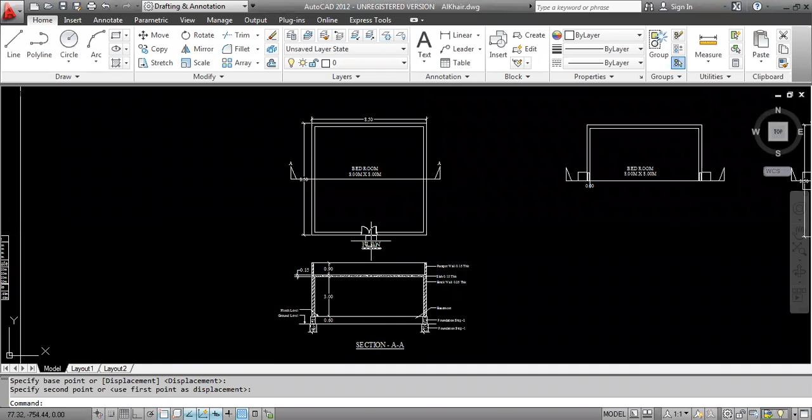See, yesterday we drew our room section. All are confused what we drawn. This is a section. When we construct any room, we have to give a wall thickness and height of the building. In section we are showing the whole details.

See, this is our foundation, this is our ground level. In ground level we are giving some foundations.

What happened, my voice is clear or not? Can you able to hear my voice? If you guys could not able to hear, it's your problem. Shahid, can you able to hear my voice? Yes sir. I think you guys have some network issue over there. From my side it's okay. Once you check over there, okay.

See, in this drawing I'm showing a section: what is the foundation level, what is our building height, what is our slab thickness, and what is our parapet wall size.

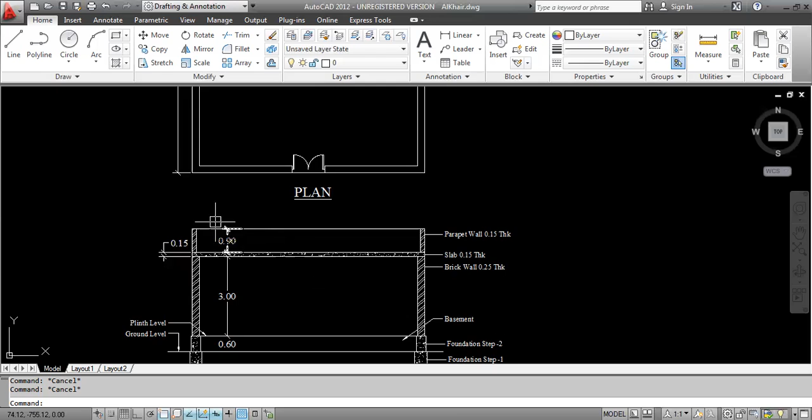See here, this is our parapet wall. Whenever you go to up floor, first floor, or else in your houses, you can able to see a balcony. The balcony wall height was this much. You think of it as a balcony wall. In AutoCAD, when we are drawing, we just give a name to this wall as parapet wall.

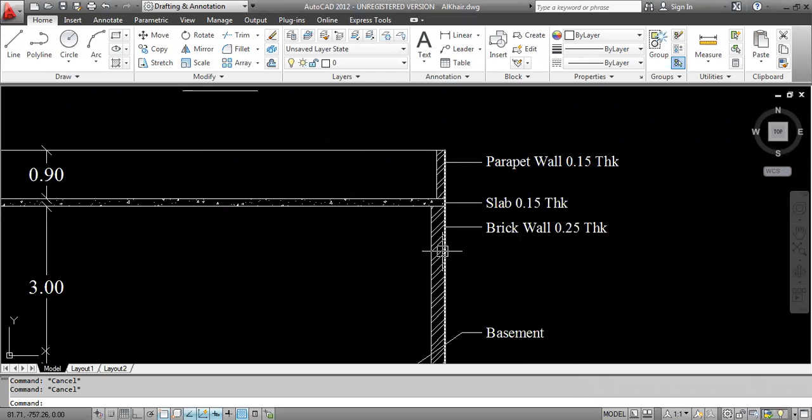Okay, this is slab thickness. Slab thickness was 0.15, and this is a brick wall. Brick wall size, outer wall size, how much? 0.25. Okay, this is our brick wall.

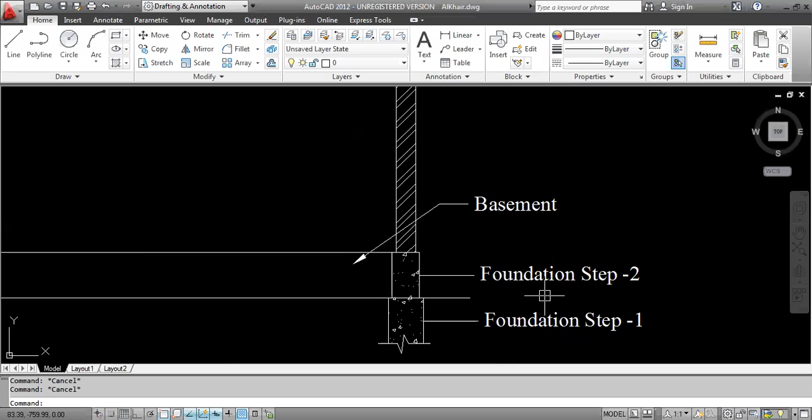And see here, this is a basement. After we provide our foundations, we will give basement. After here we are showing foundation level step 1 and foundation step 2. This is our drawing, and this is our plinth level.

Plinth level means when you finish your basement, it's up to clean. In that you are attaching marble stone, or else you're just pouring concrete over there. This is what is called your plinth level. This is your plinth level, and this is basement.

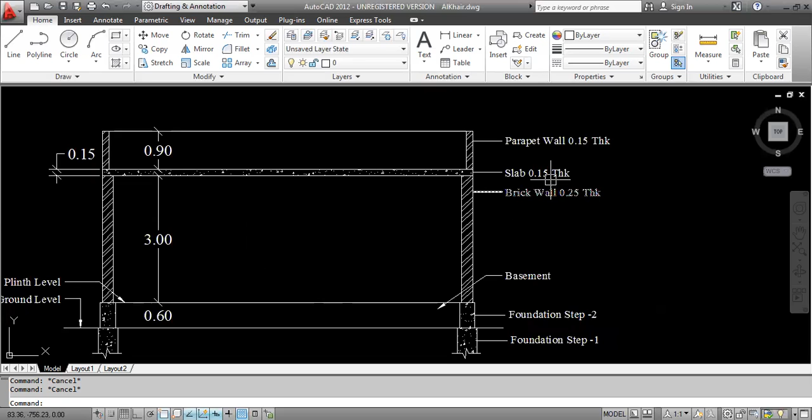This is foundation step 1, step 2, and this is basement, slab thickness, and wall. Why? Because in this wall we did not mention any kind of windows. Now today the same wall I took. Just I drew over here, I'll show you.

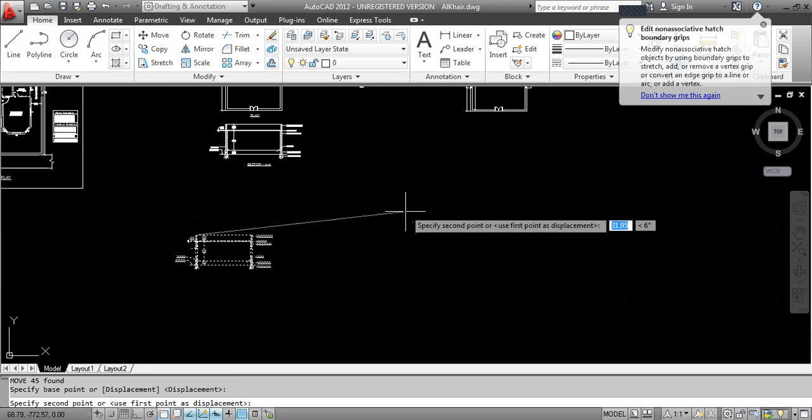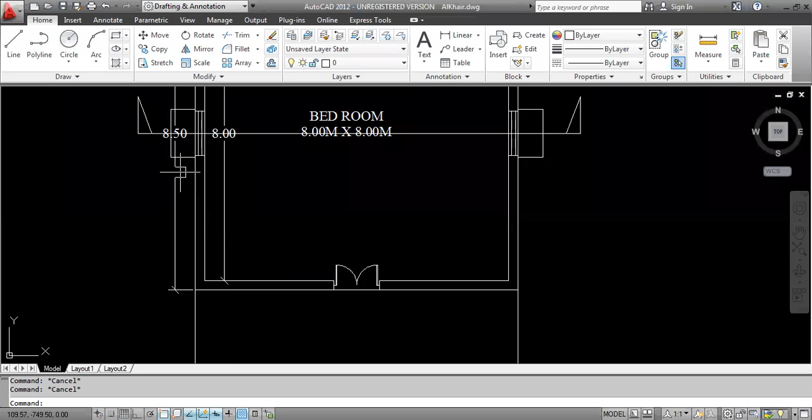Outside, this is not a platform, this is a sunshade. See here, I'm providing here sunshade. Now we have to show here a window.

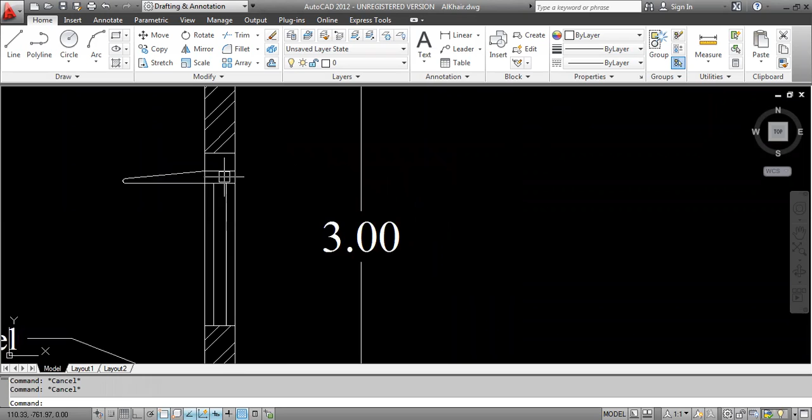Window, enter. Just will show as these lines, window opening, window indication over here, and here will show some concrete hatch. You have to take here concrete here and here, again enter.

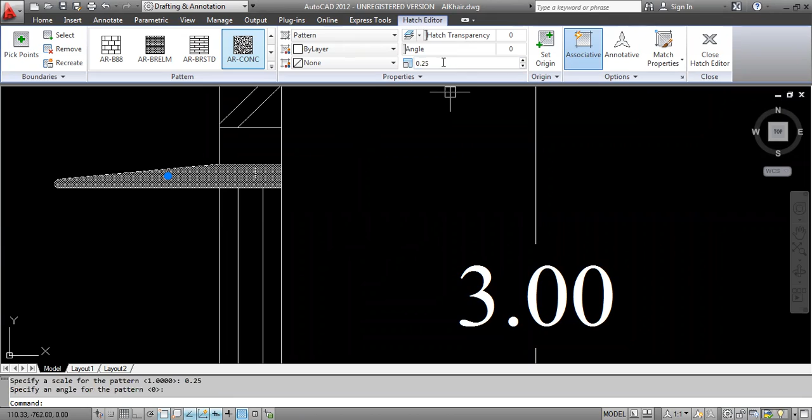If you want to change the size, you can able to change from here. How much? 0.25. Enter. It's too big, then we will give 0.1. See, if you want to make it small again, 0.025. See, you can able to see over here, and this is your

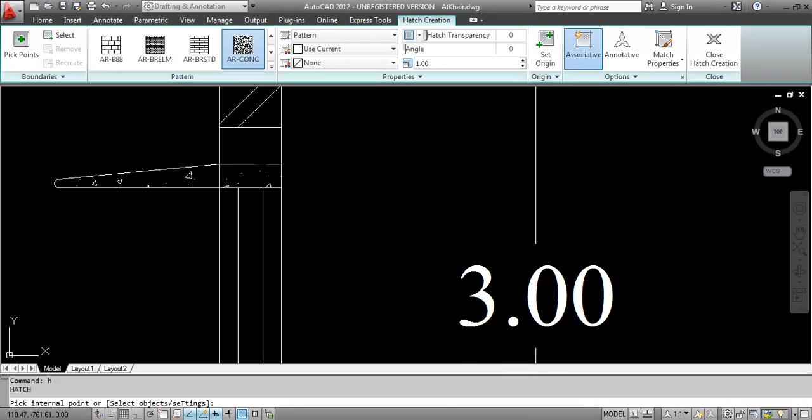bed. Hatch again, sand. Okay, nothing will happen, you took concrete in the same place. Again hatch. Okay, see, this is your platform. You have to mention over here the name.

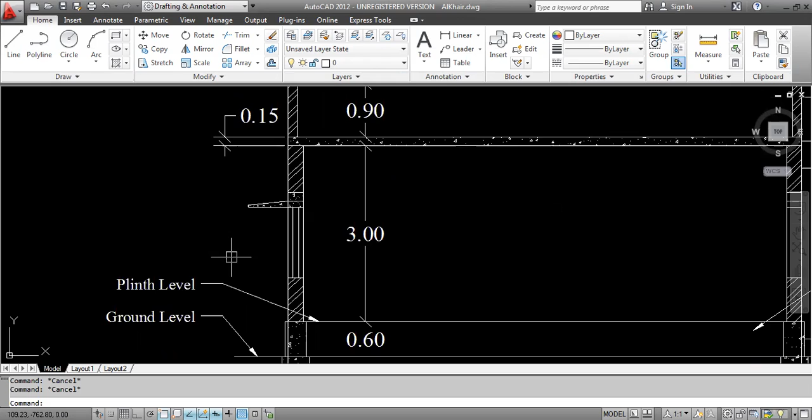If you want to type this one for creating your name, sunshade, sunshade.

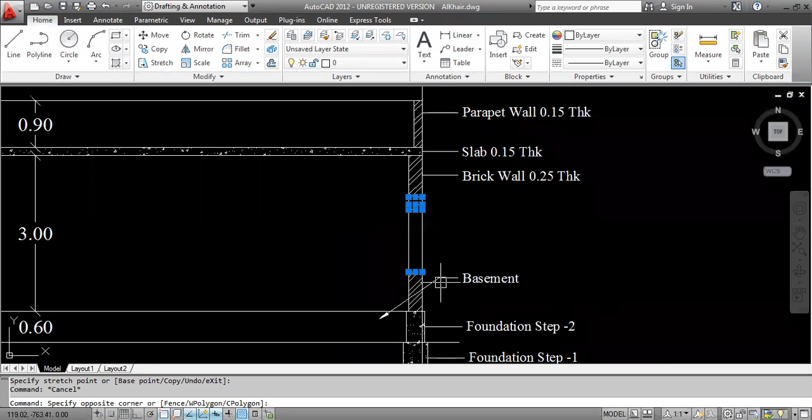I'll remove the whole thing. First, we'll draw over here. Here we have to give some concrete arc.

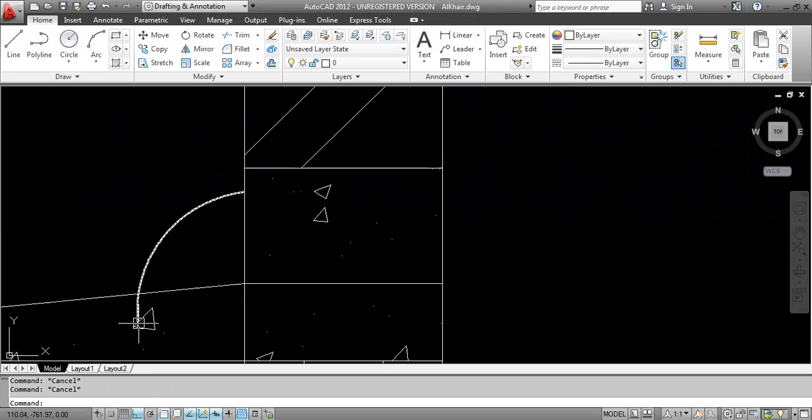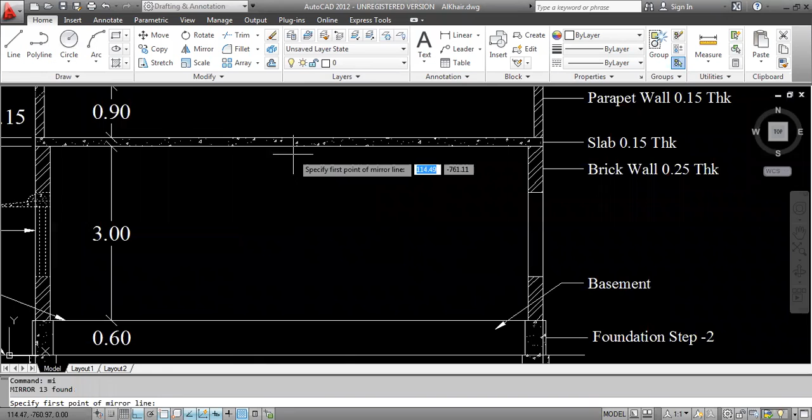Let's enter. Match. Okay, now you draw this one. Okay, just you have to select this whole thing and mirror it. Mirror, enter. You have to select from midpoint. It came. You can able to see easily over here.

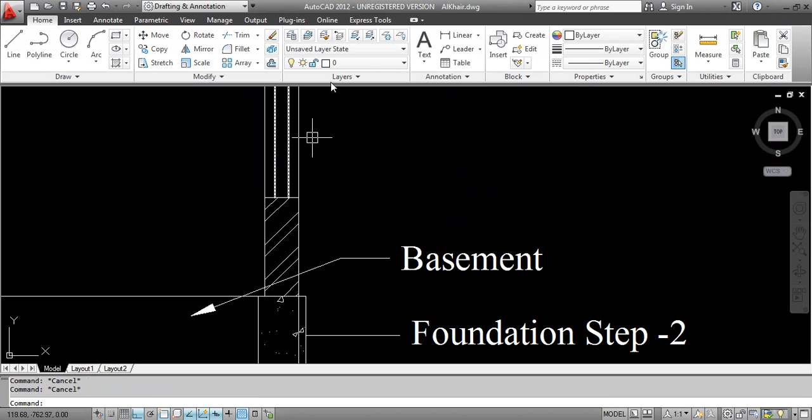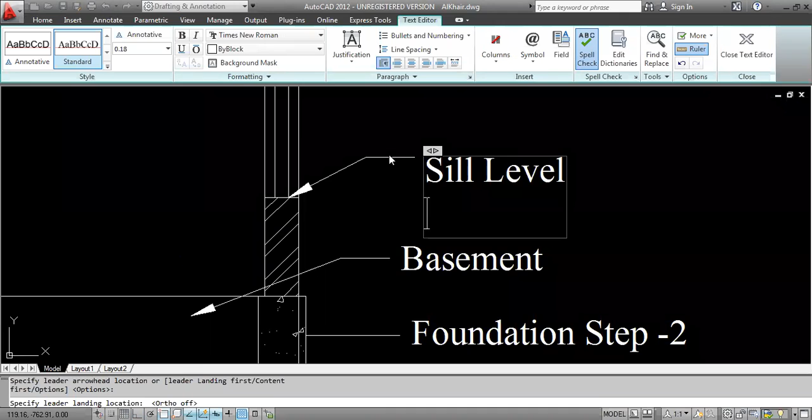Again, you have to give here name this side. Sill level. Okay, this is your sill level.

Now you have to show here a window. You can able to see after this line, the whole thing you have to draw. This window you draw and this sunshade you draw, and this window and sunshade you draw. You have to draw this window.

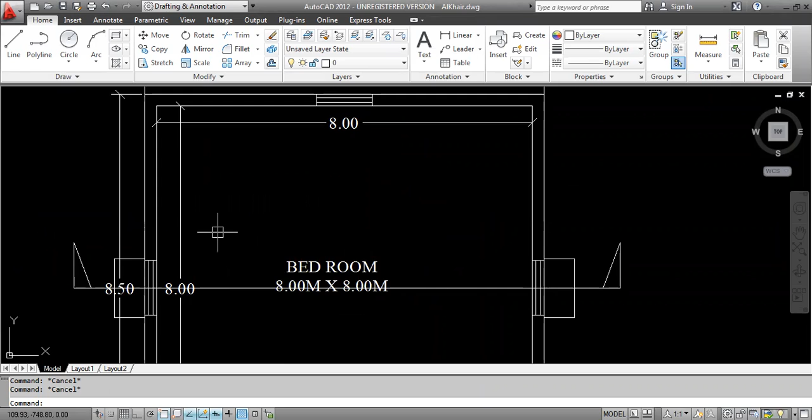Okay, we have to take Xline and vertical line. Okay, this you have to select this line and delete it. Okay, now see what is the height from ground level. Offset 0.75. Okay, just you have to take 0.75 value.

After that, how much window height? 1.2. Okay, now I am taking here fillet command. Enter and enter.

I sent you one PDF. In that I mentioned the thickness of D1 door and window W1. Okay, you can easily check in that what is the width of this window frame. I am giving 0.05.

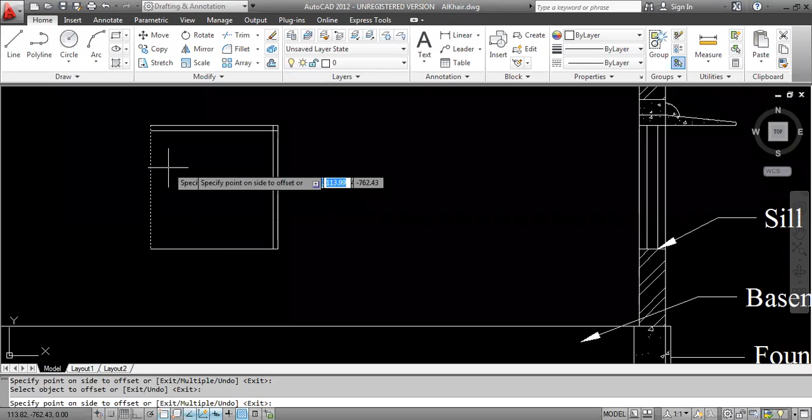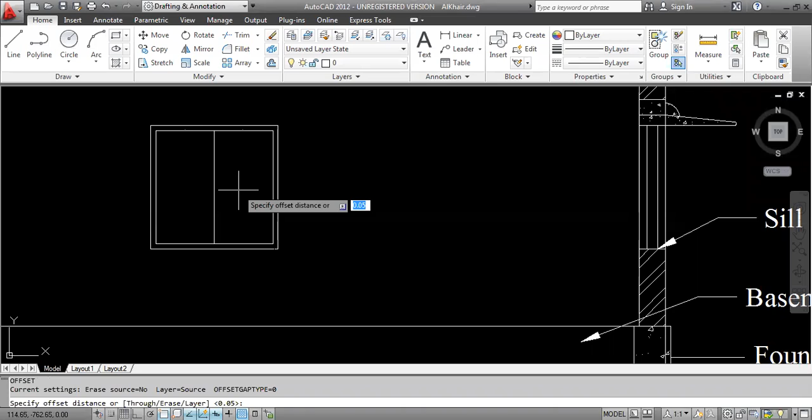Offset, sorry, fillet. Okay, if you want to take a single line or else if you want to take a double line, as your wish, but I am taking here single line for easily understanding. See, now I given here 0.05. What is the half value of 0.05? That is 0.025. Okay, see, I am taking here offset and here offset.

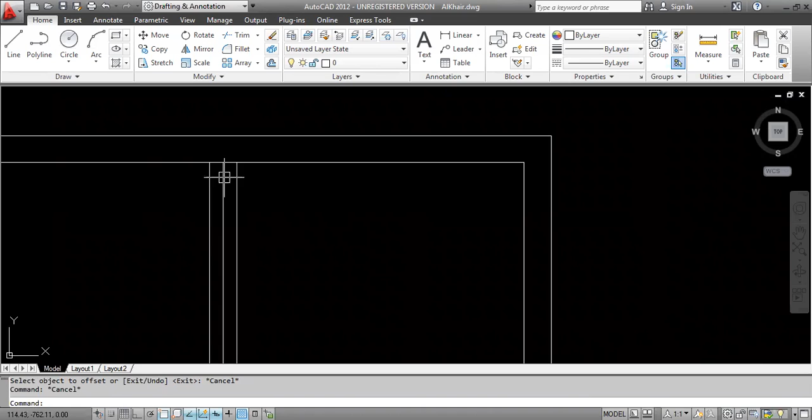Now I am deleting, I am erasing this line, okay, which I took for center. Now I am doing trim this side and this side, okay. This is your window frame.

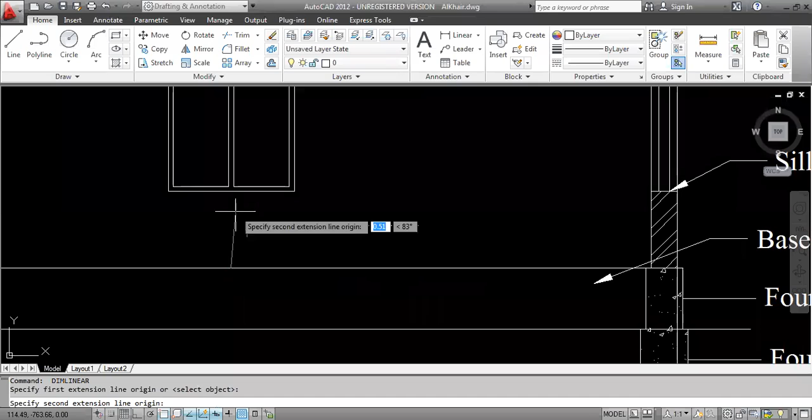If you want to check dimensions, you can able to check what is the height from floor level, plinth level, okay. This is your plinth level. From plinth level we are providing 0.75 value, okay. What is the height of window? You can able to check over here. See, as per this drawing, the window value is okay or not, you can able to check.

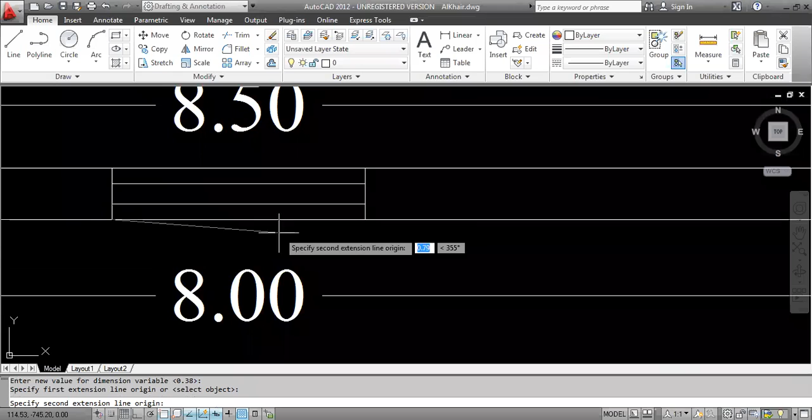See, okay. Now you have to remove this one. Easily you can able to see what is the differences between both.

Okay, see here we given only walls, and we are showing only walls and slab thickness and height of our building. Now in this, inside windows are coming and walls also coming, okay.

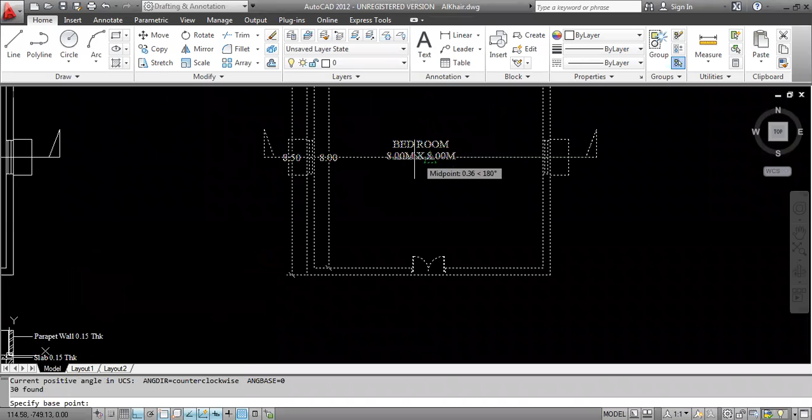Now we have to show in wall this main door, okay. Just I am selecting whole drawing, copy, select whole drawing, okay. Now I am doing for this rotate, select whole object and rotate command, that is, okay.

Whenever you are taking any kind of drawing, you have to keep in level. Why? Because it's very easy to do work, okay. Now I am taking here, from here I am doing a cutting for section, okay.

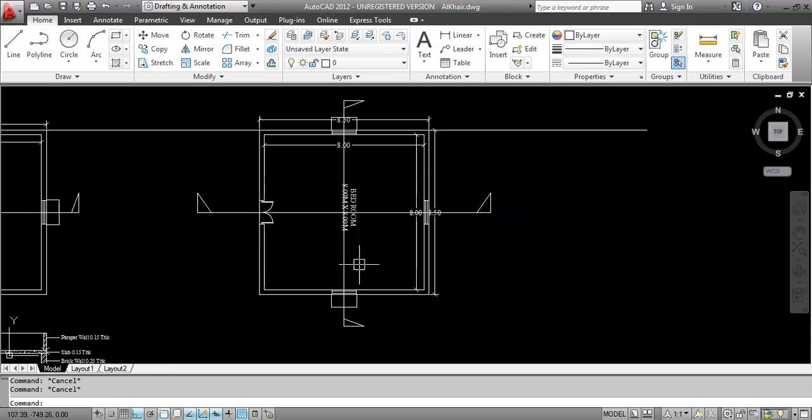I am erasing this one, this one, this one, okay. This one also, here select one line, I am erasing this whole, okay.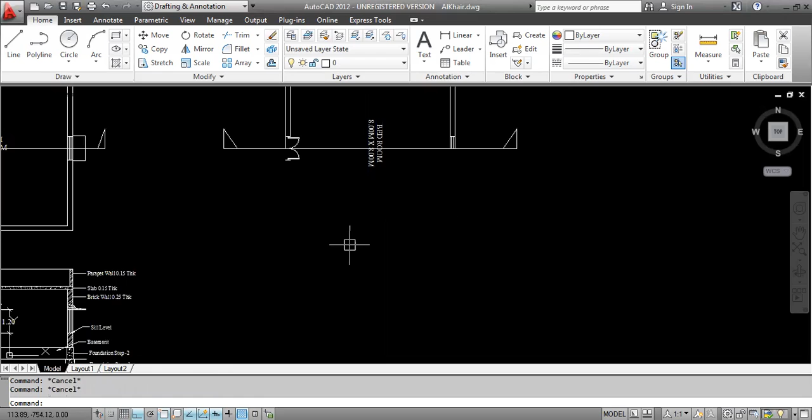Now you see XL, enter, V enter, okay. Selecting this one, and I'm selecting this window and this window, okay.

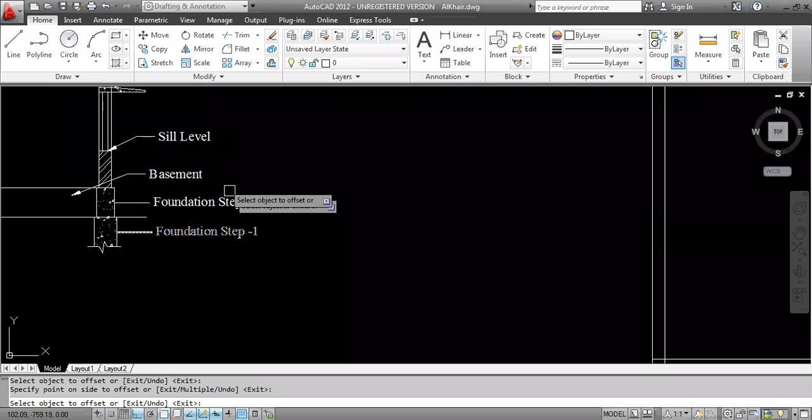Here I'm taking, or else to come from ground, it will be easy to you. Offset foundation level was 0.6, okay. Again I'm giving 0.6. Why? Because in this section you can able to see we are providing two foundations, step 1 and step 2, okay. That's why this is step 1 and step 2, okay.

What is our building height? It's 3 meters, okay. Now I am providing here slab level. What is our slab level? 0.15, okay. See, now I'm giving parapet wall size 0.9.

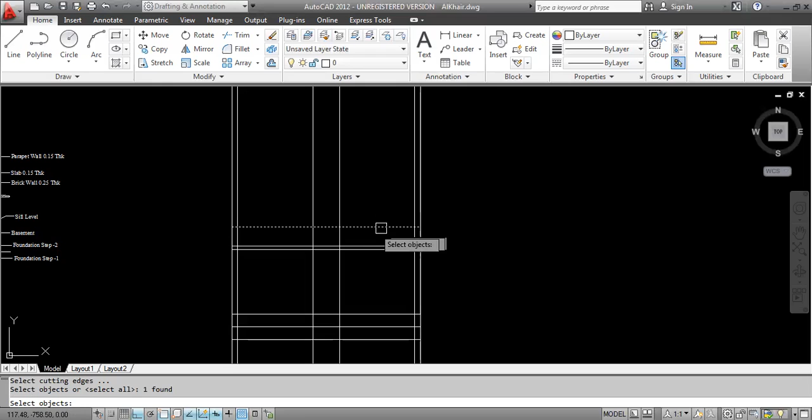So here I'm doing trim: TR, single enter, selecting this first object and then enter second object, and I'm doing trim for this all. The same thing for this, selecting first object and enter, and selecting second object.

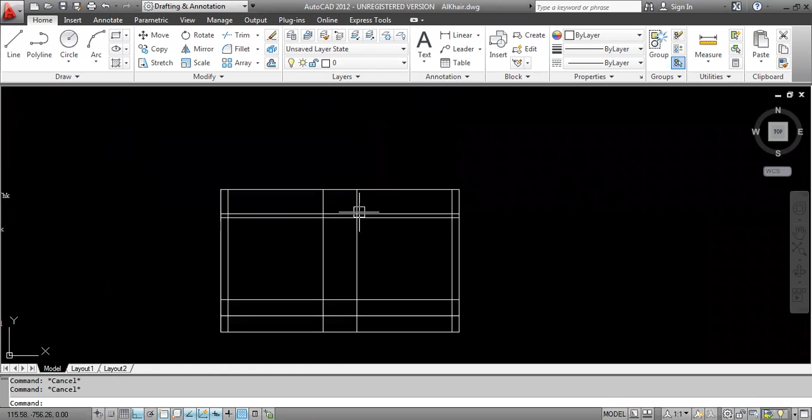Now you have to take it in level, move it, okay, now you have to do trim. This is your parapet wall. You have to show inside slab there is no line. Here also in foundation level.

Here I am using polyline command. I am giving foundation value as 0.05, enter, again 0.6, 0.05, 0.6.

Again here also I am giving polyline: 0.05, again 0.05, 0.6. Now I am doing join to this both.

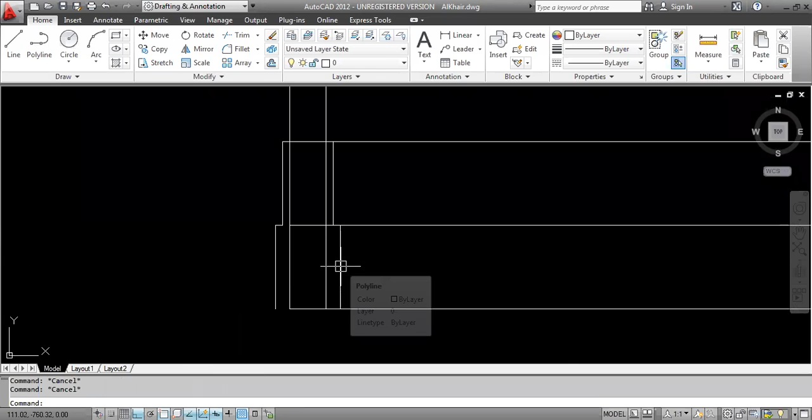Again I am selecting for another foundation. Now I am deleting this line and I am doing trim, selecting first object, then you have to do trim for second using second enter.

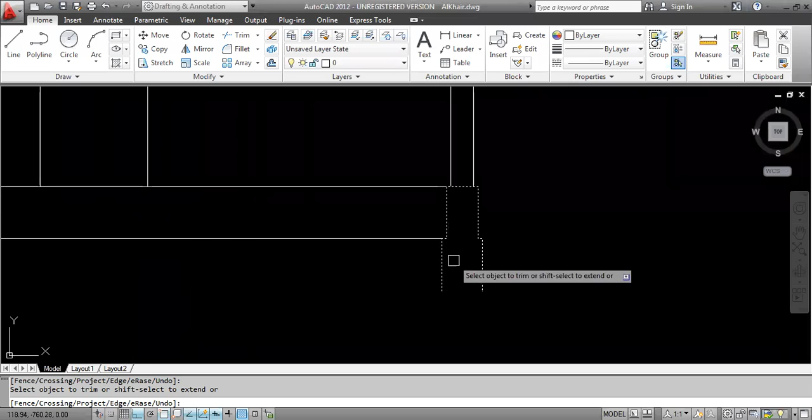Here you have to use break line. Break line, enter, S enter, 0.015.

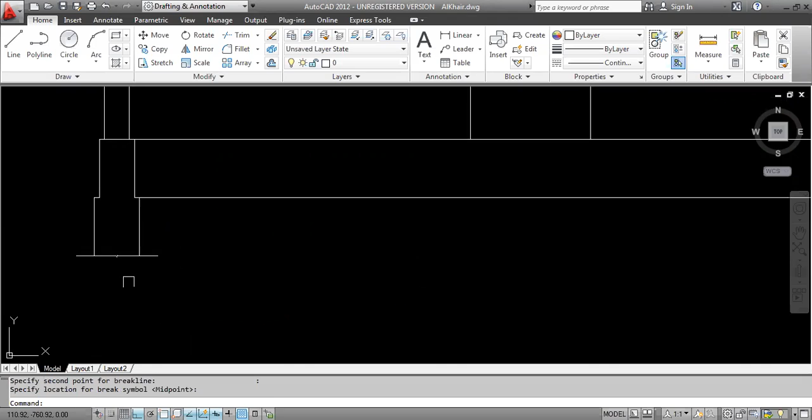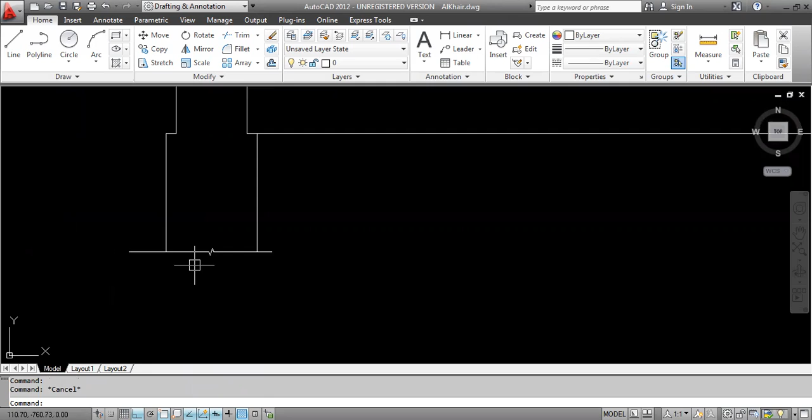Break line, you have to give here size 0.025. Select first corner to second corner for indication. If it's showing too small, you have to give again.

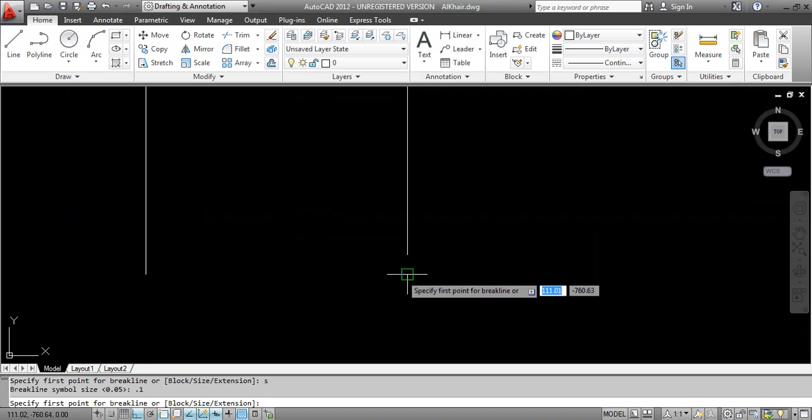Again I am taking break line command. Size I am giving here 0.05, or else size I will give 0.1. Enter. See.

Using break line command - okay, yesterday we did with polyline. Here we did as polyline, but now here we are using break line. Now we have to delete these lines also.

What is the thickness of inner wall? Anyone can tell me? What is the thickness of inner wall? 0.15. So we are giving the parapet wall size as 0.15.

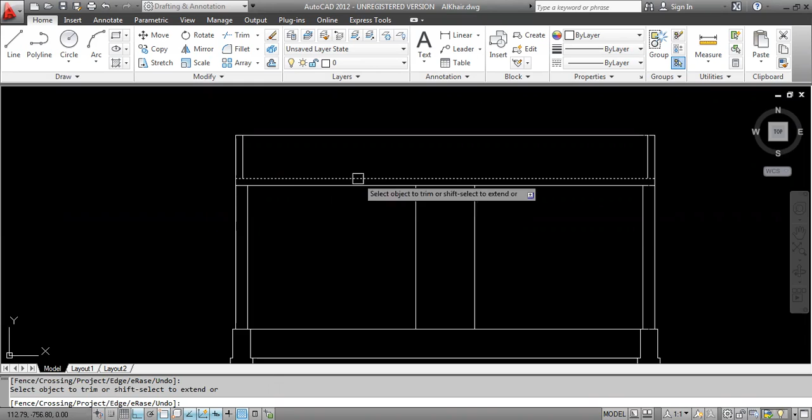Again you have to select this trim and do it here. Now we draw this shape. Now we have to draw a window.

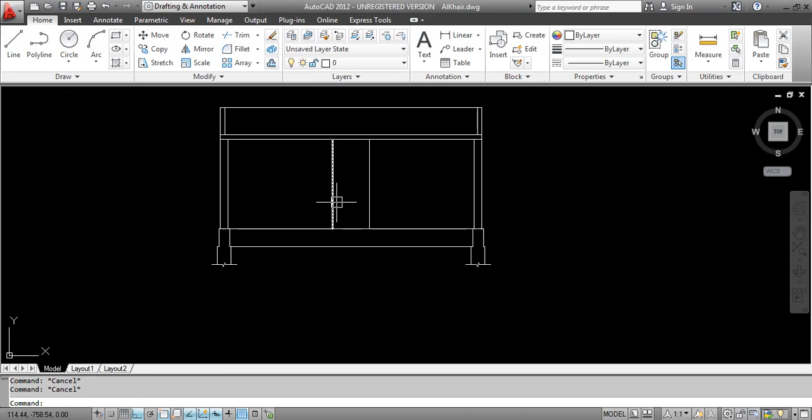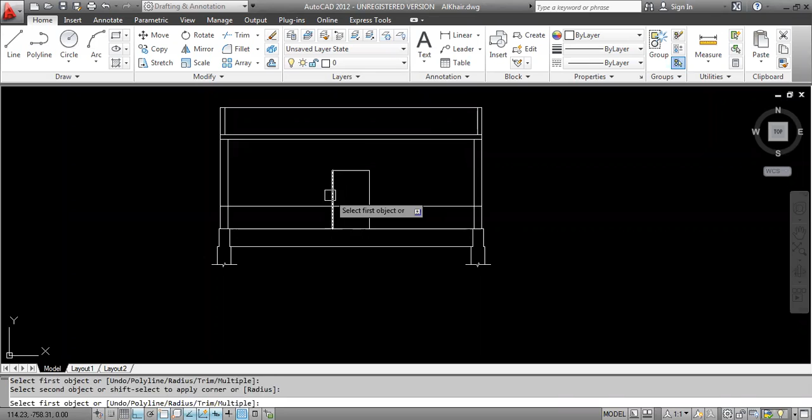What is ground level? Just now I showed you that is 0.75 value from plinth level. Afterwards we have to take 1.5 as the height of window frame. F enter, M enter. Now what is the thickness of window frame?

0.05. Now you have to take here multi-line. Last time I showed you by using line command. Now I am showing here multi-line. What is the thickness of window frame? It's 0.05. Enter.

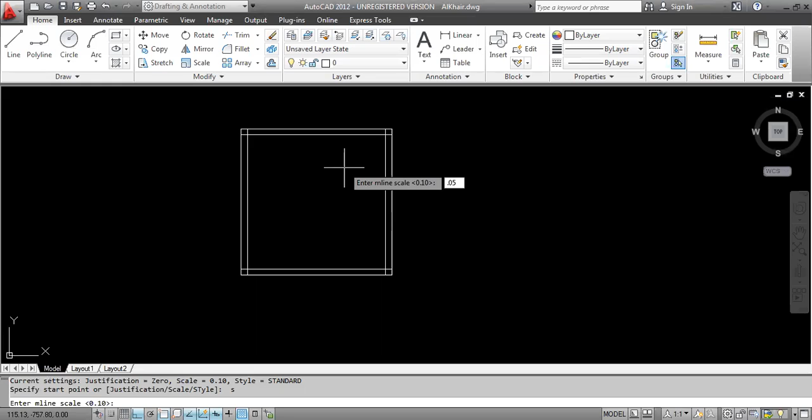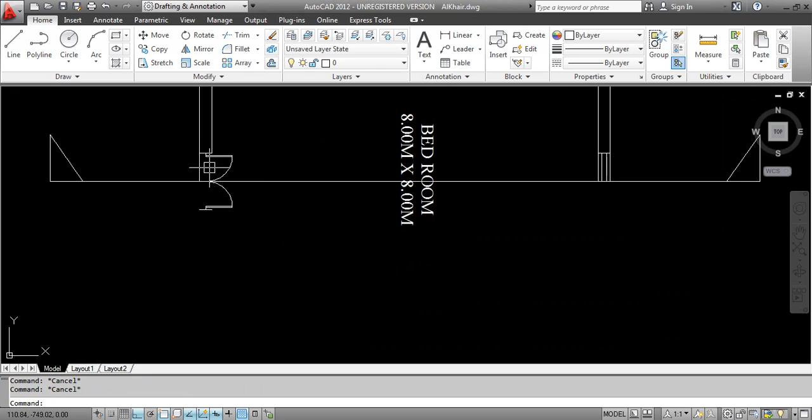See, it came already. You have to explode it. This is your window. Now you see here some door cutting is coming. Here also one window was cutting.

Now I am taking the value from here: 0.75. Offset 1.2, sorry, offset 1.2. I am showing here window.

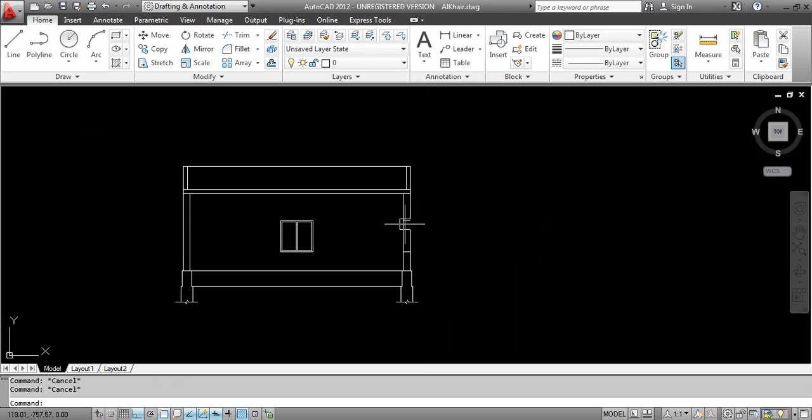Multi-line. Now you have to see what is the size from floor level. It's 0.15. What is our door height? Anyone can see and tell me in the schedule? That is 1.95.

You have to remember the whole thing. Now I am showing here door opening. See, this is our door opening, this is our window opening.

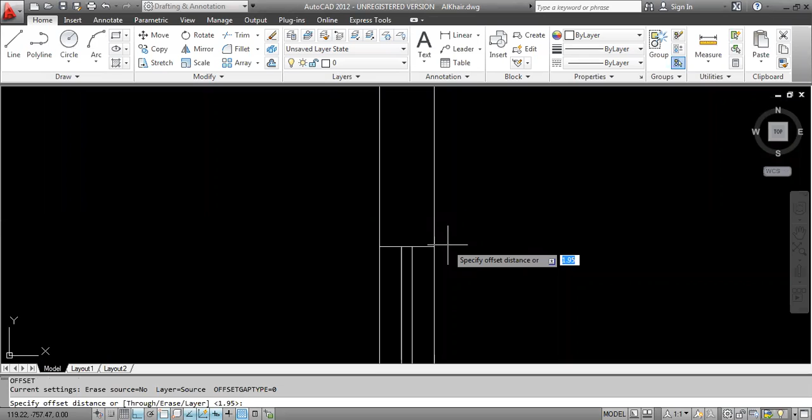Now here you have to show one sunshade. How you have to show? I'll give value 0.25 from here, now 0.05 from down, or else you can able to take 0.1.

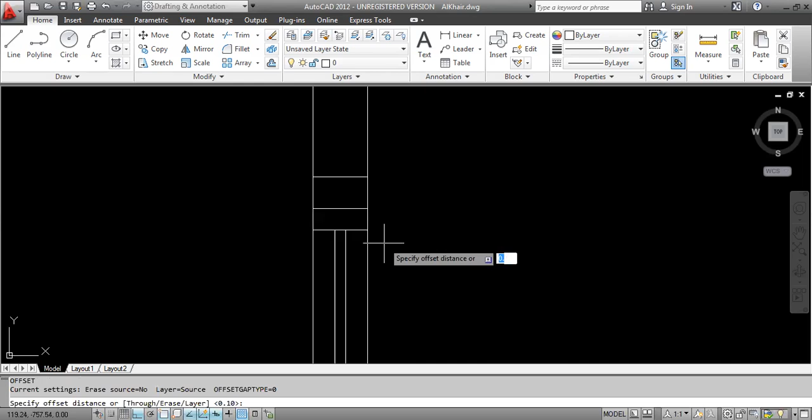Now what is the sunshade length? That is 0.65. From here I am taking offset. I am making it.

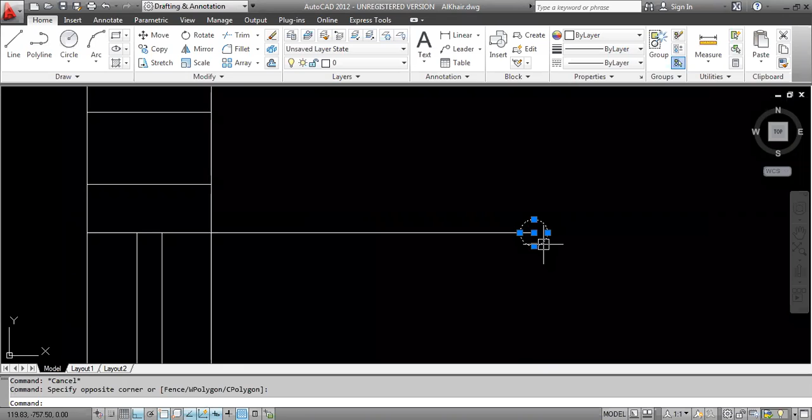Now here I am taking some circle. Why? Because we have to show a slope, right? That's why. From here I am connecting. For this we have to create one arc from here to here.

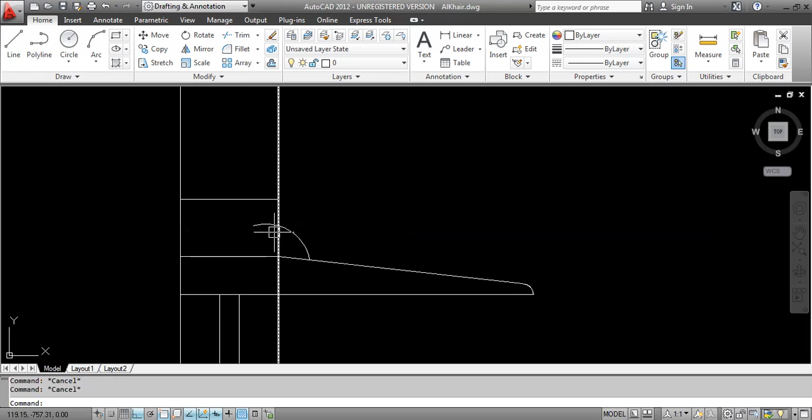Now in this you have to show whole hatch. Now hatching command - by using hatch command, shortcut key was hatch, enter. See, this is concrete we are showing here.

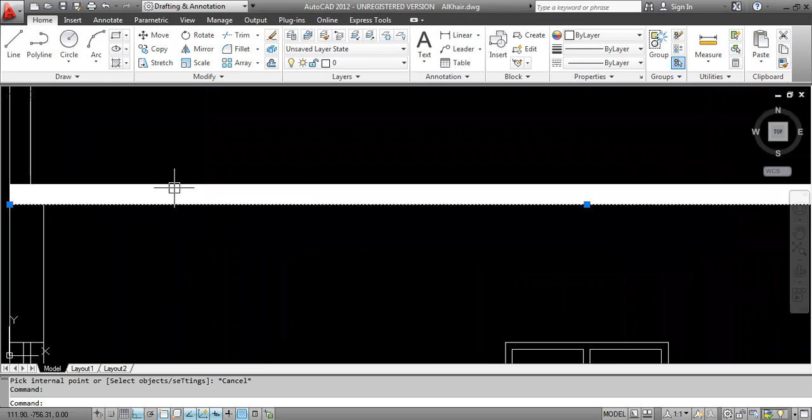Now we have to reduce the size of concrete: 0.5, or else 0.1.

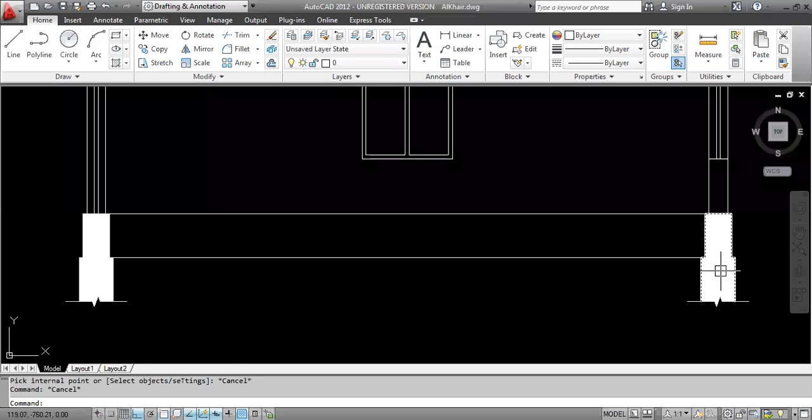If you can't able to see it means you can able to reduce the point. Afterwards you can able to see. Again you have to do hatch. 0.05.

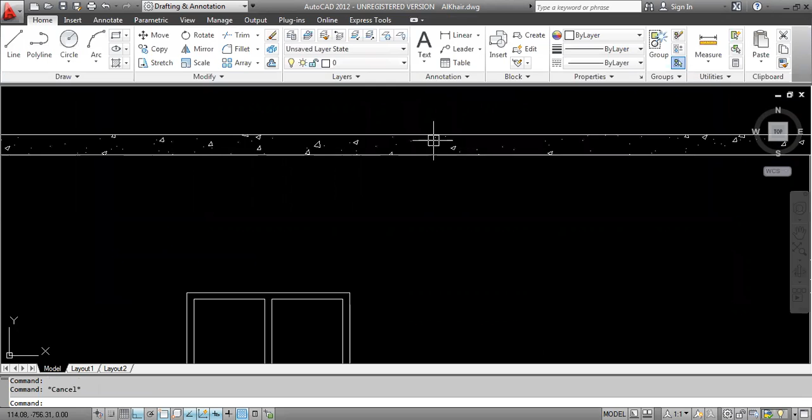If you selected one time, when you select this object, at the same time this object also will get selected. If you select separately, this is a separate slab. You can able to select only one object. When you're selecting, you have to be careful.

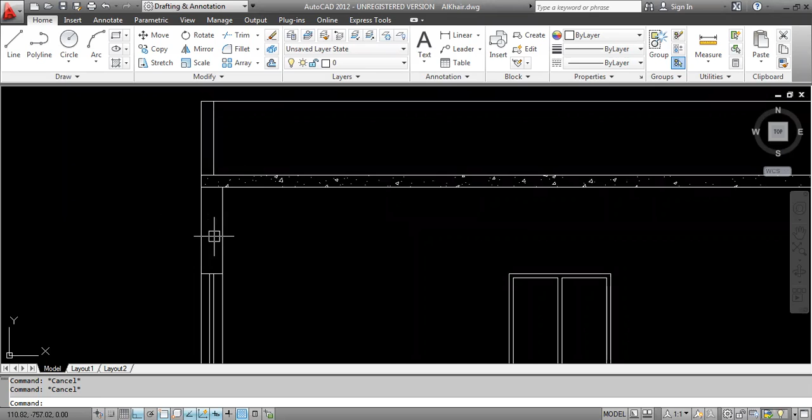Now we have to show here wall, brick wall. Brick wall, we'll do hatch. We'll select these lines for brick wall indication.

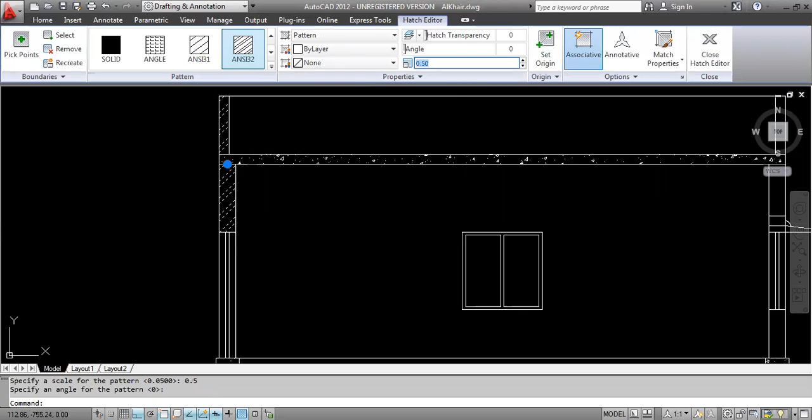Okay, this size is too much big. For this we will reduce to 0.05 - it's too much. 0.5, okay, or else we will give 0.25. You can able to see what is the difference between this wall and this wall. Again you have to make hatch.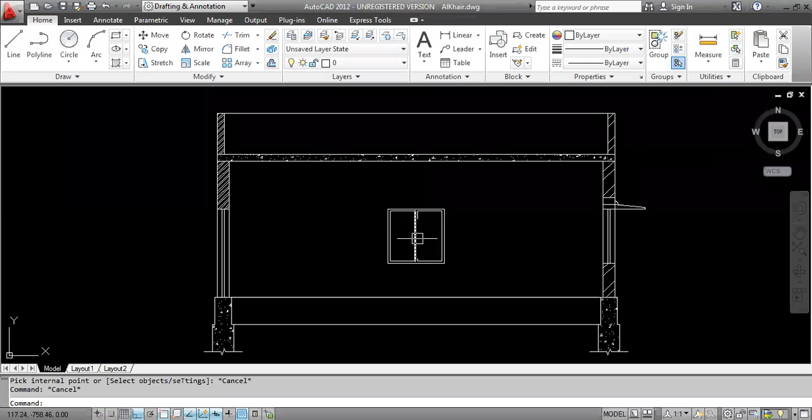Just we have to match the same value. Okay, now here we have to show a concrete.

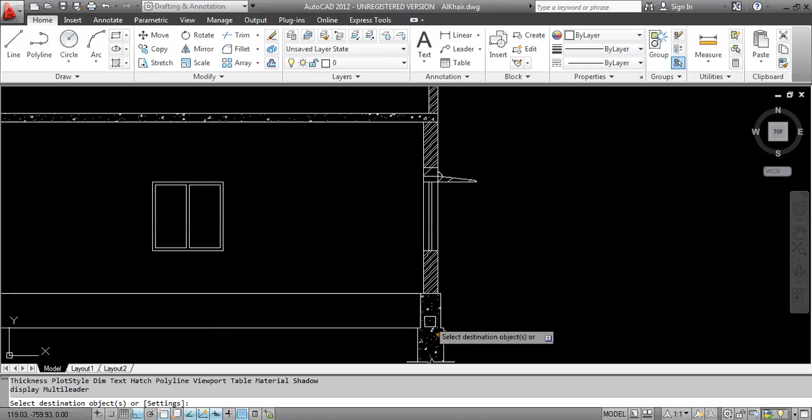This you have to match. Okay, if you want to reduce from here, 0.015. See the difference between this concrete and this concrete, you can able to make, okay.

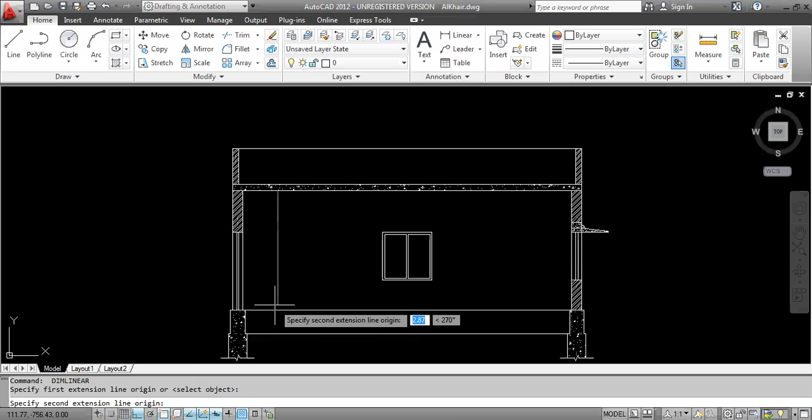Now I given here, I draw this value, na? I draw this section, okay. Now I am giving what is the height of building I took, okay. Inside I took 3 meters. Outside we have to show a slab thickness, okay. Now we have to show parapet wall thickness, okay.

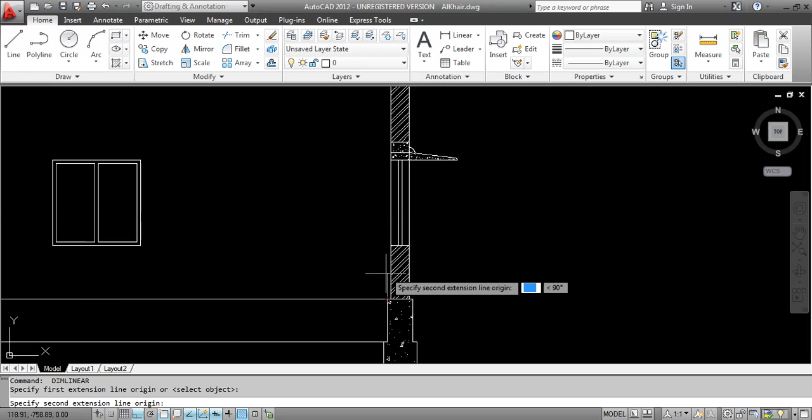If you want to show the window from plinth level means you can able to show, see, from ground level we are raising this much height for window, okay. For this also you have to provide the value, okay.

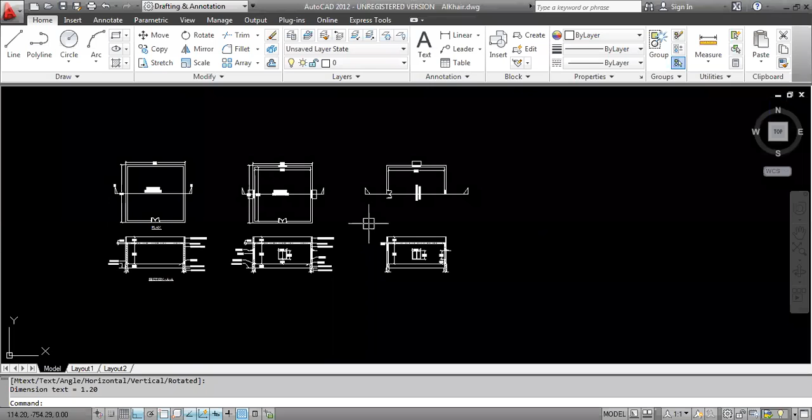Now, yesterday I sent this drawing, na? I will send today this drawing and including this drawing, okay. In this drawing you have to mention a text.

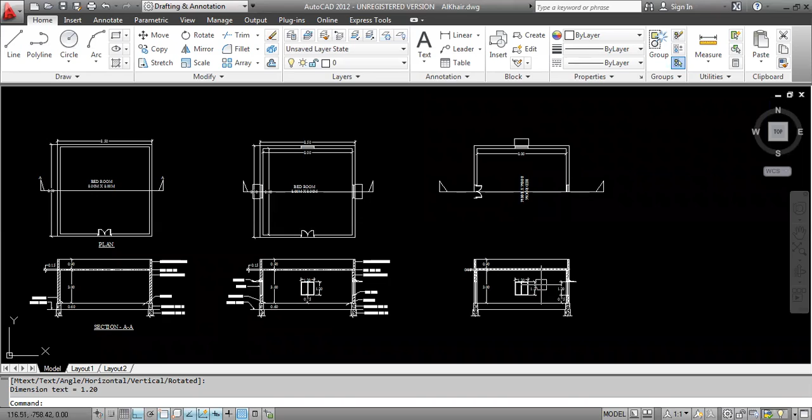I won't mention, okay. Why? Because here I already put some text. You have to just see and write it over here, okay. This is your homework. I will send today this one and this one, okay. In this you have to add a text, see the drawing and write it over here in this section, okay. Why? Because our class timing also coming up.

Now in today's class you guys have any kind of doubts? If you have, we have 5 minutes. In that 5 minutes I can able to clear your doubts.

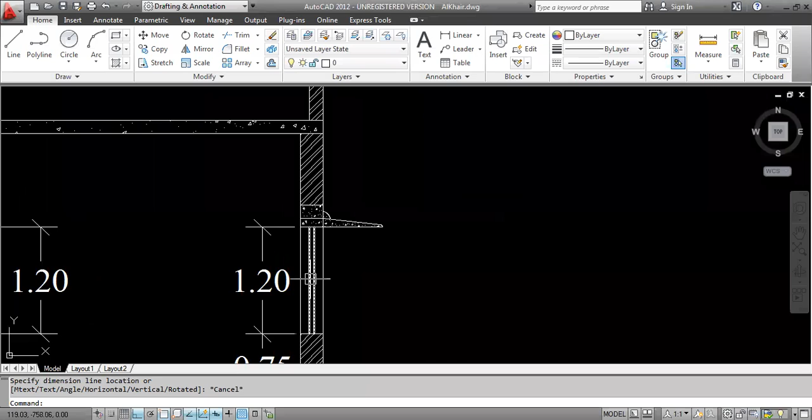Now, anyone else? You have any kind of doubts related to today's class? Abdul Basit, Abdul Qayyum Faiz, Aisha Siddiqa, Sayyid Naimuddin Saab, and our Muhammad Furqan, you guys have any kind of doubts? You can able to ask me. Yeah, Furqan. Yeah, Faiz, ask me.